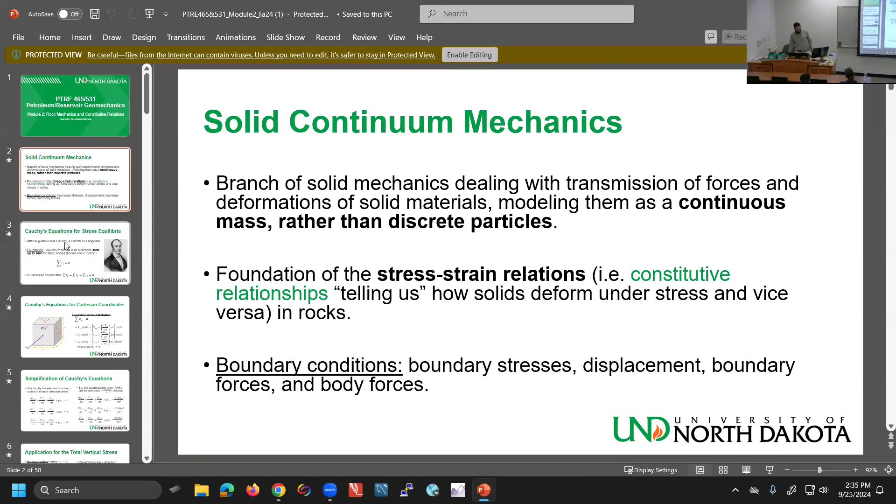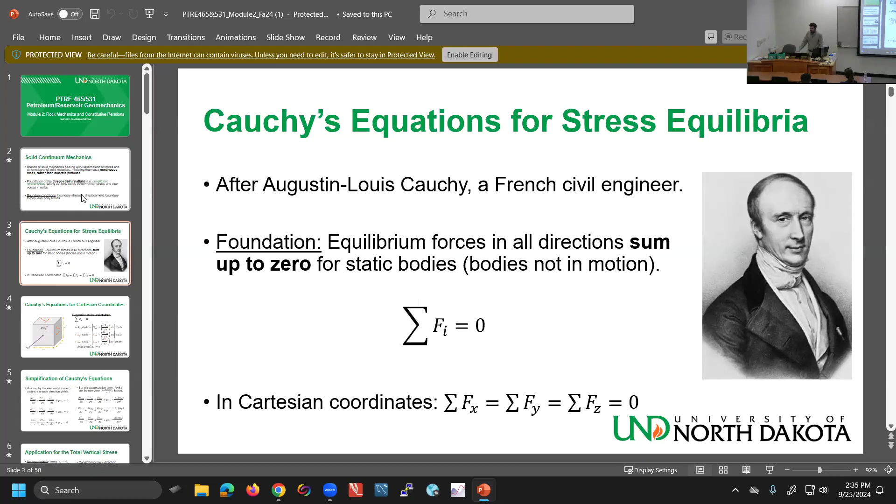PTRE 465/531. Last time we went a little bit fast through 15 slides, which were a little bit overwhelming. We talked about constitutive relationships and we started putting everything together. We went from a force balance in each principal direction to a matrix notation, a tensor notation.

We started putting a lot of equations together, and there was not a mistake, but some confusion I made accidentally, because both terms have ACC in how they start. So this is the acceleration term. This is the accumulation term. So acceleration is the one that has the A alpha whatever.

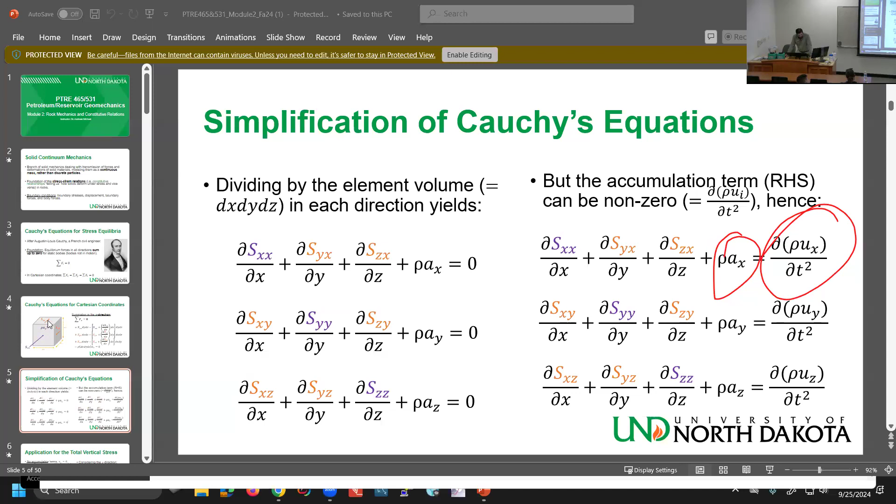Another way to show it is here. Acceleration term, accumulation term. Remember, accumulation is with respect to time, always. And when you hear something is steady state, all accumulation terms should go to zero. So that's something I wanted to clear up. I watched the video and tried to go over what we did, in case I went over something a little bit too fast.

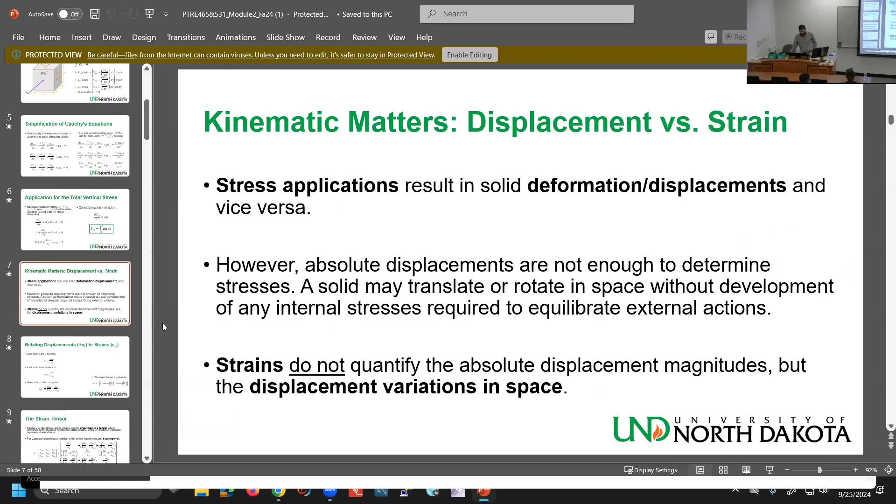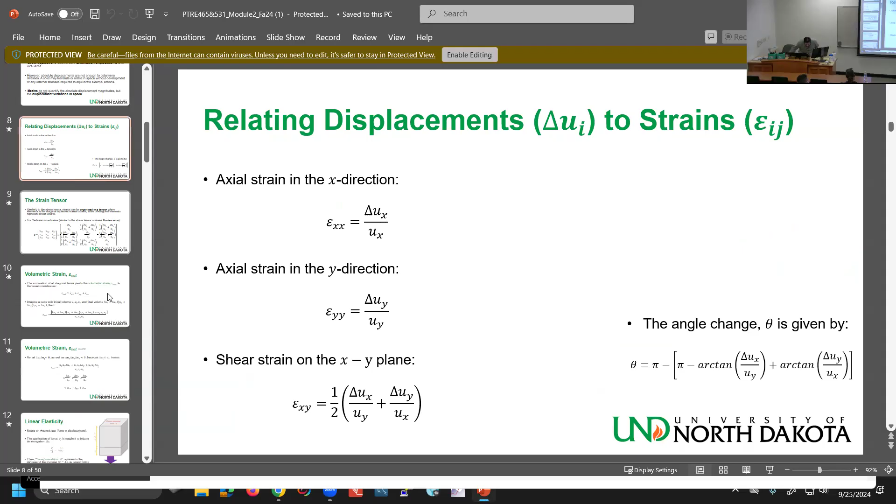And then we said that this is good for small deformations in rocks. So for small deformations in rocks, linear elasticity is okay. It's not an amazing model, but it's an okay model. And given that it's the easiest constitutive model to apply, we will go with that.

But we said in real life, rocks have what we call anisotropy and what we call heterogeneity. And I went through that a little bit fast. I need to explain them. So heterogeneity means if I go from one place in the rock to another, I have different properties. I have different properties where Malek is sitting than where Hakim is sitting, etc.

Now, anisotropy has to do with tropos, which means way in Greek, basically direction. So if I'm looking at one direction, I have one value. If I look at a different direction, I have another value. And so these are both degrees of complexity that I might have in the rock that my model will struggle to incorporate. So I wanted to explain them.

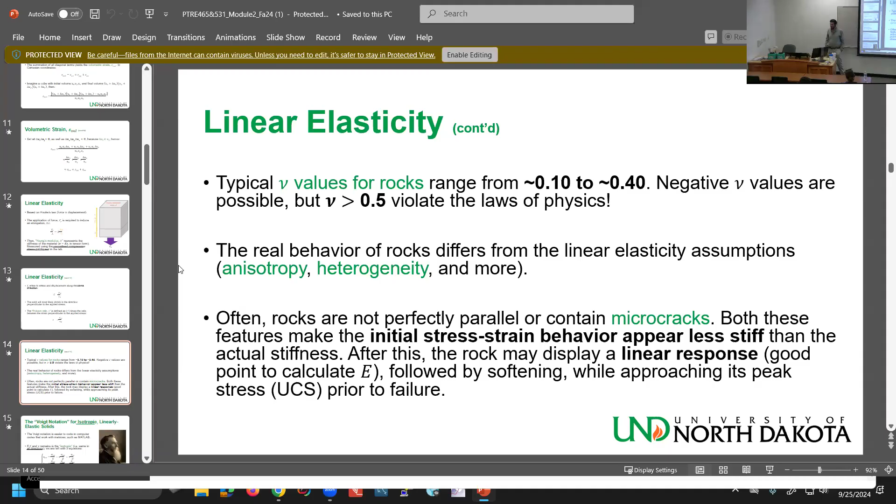The Young modulus, which is basically: I apply a force on my material, I extend it in the direction that the force is applied, and then I get a measure of the stiffness, and that measure of the stiffness is Young modulus. The stiffer the material, the higher the Young modulus. And the Young modulus has dimensions of pressure.

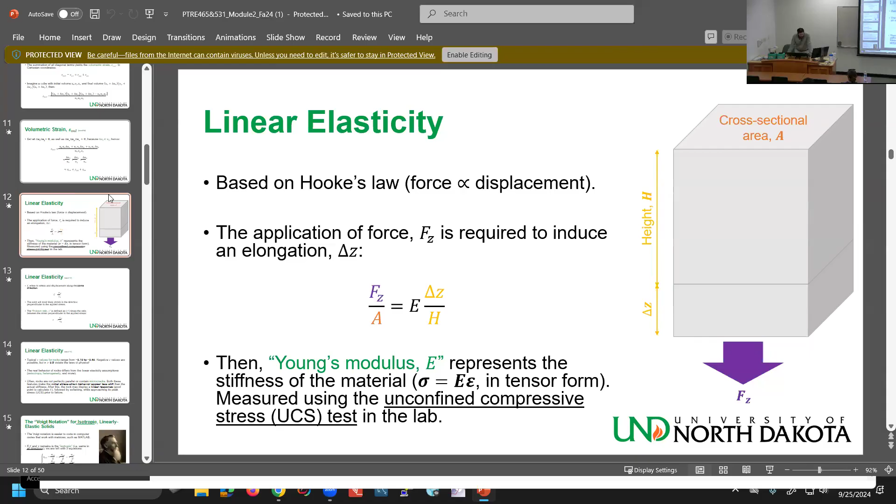And then we talked about another one, and we have upcoming example problems that will help you understand how these are calculated. Poisson's ratio, which you should already know from solid mechanics, is dimensionless. If I elongate a piece of chewing gum, it becomes narrower. I compress it, it becomes fatter. Displacement in one direction induces displacement in the orthogonal direction, given by Poisson's ratio, which is dimensionless.

And even though the name is Poisson's ratio, it's still a modulus, because if I assume that my model is linearly elastic, there are 6 moduli that can be used to characterize how it behaves, stress versus deformation. Out of those 6, the way they are interconnected, you only need 2 to get the other 4.

And generally speaking, Young modulus and Poisson ratio are fairly easy to measure in the lab and very easy to understand physically. We are going to see the remaining 4, but it gets a little bit more complex. It has to do with wave speed through the solid and other stuff. But Young modulus and Poisson ratio, you need to know physically what they quantify and be comfortable with them.

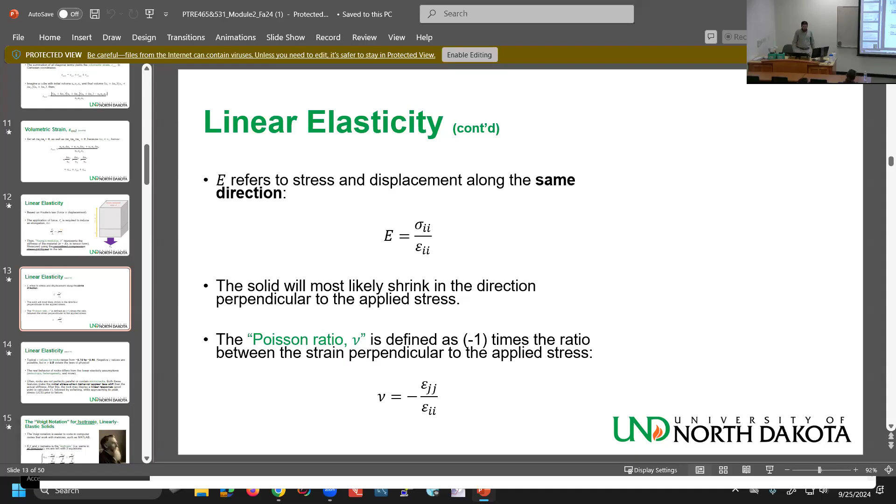So now, what did we say? There is anisotropy, so different in X, different in Y, different in Z. And then the way that those properties are arranged is such that you end up with a 9x9 matrix tensor.

So you have 81 values in it. That means if you have one core, you have to make 81 measurements for each property, 81 times, and you have a lot of complexity and associated errors as well. It becomes a mess. And this guy, Voigt,

he was a mathematical physicist, German. He was an amateur musician. Like a pianist as well, I guess. Yeah, but he was a Bach guy. Pianist. It's like one of the complex melodies they do in the orchestra, you know? German melody. Oh, okay, that makes sense. But he was a chair of a department. He was a big guy in academia. So music was his hobby.

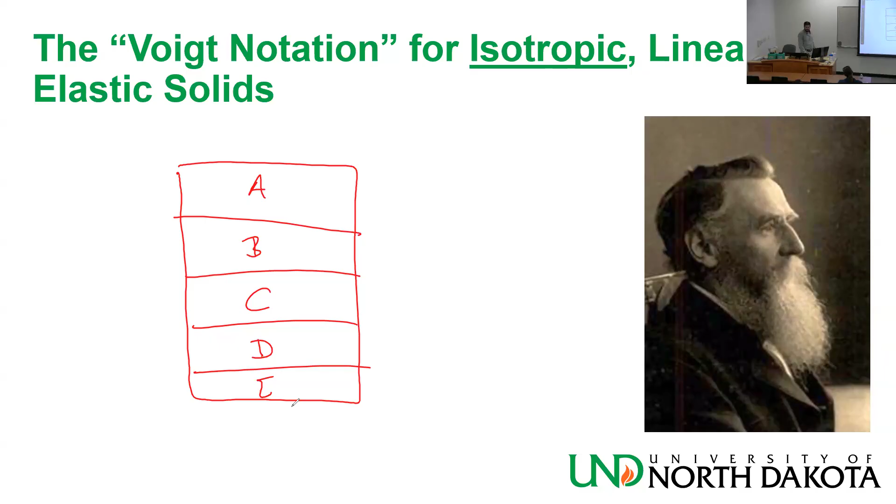Shales too. These are very useful, then Voigt's notation can be good for each layer. It helps simplify things by assuming isotropy. And even if you have anisotropy, it's not useless. You can still use it a certain way. But yeah, the tensor as we know it was his concept.

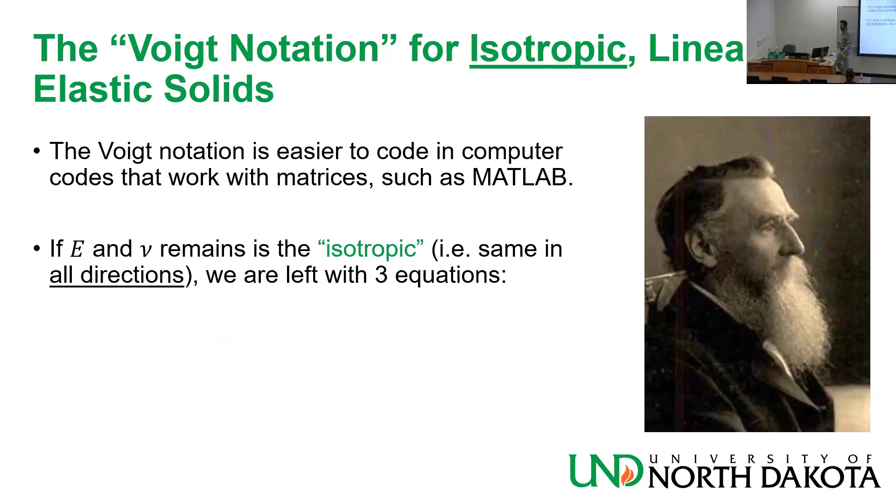And isotropic: let's assume that E and ν, Young's modulus and Poisson's ratio, are the same in every direction. So I have isotropy, and then I'm left with three equations for the normal strain. The normal strain in the x direction is the one induced by sigma xx, normal to it, minus the Poisson ratio times what is induced by sigma yy, which acts perpendicular, minus the Poisson ratio times what is induced by sigma zz.

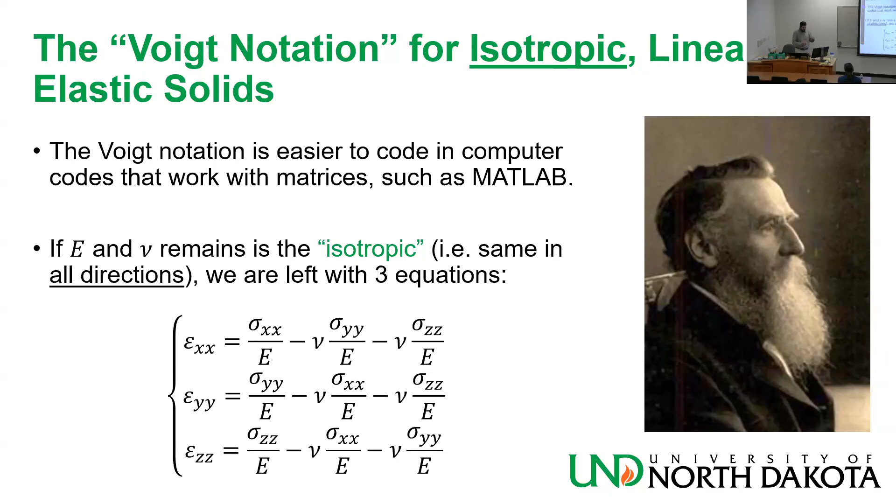Now, if you are confined on the side, imagine I'm applying a stress like this, the walls are holding it together, so they are applying stress in the lateral direction. I need to take account of that too. The earth is like this, you are confined. You get the tectonic stresses from the sides. And you have it in all three directions. It looks like you have two epsilon xx, but when you arrange them in a certain way, it's going to be more understandable.

Shear strains now are a little bit more complex. We're going to use a new modulus, take it as I give it to you, there are two pages of derivations to get to it, but what we call the shear modulus of elasticity is basically the Young modulus divided by 2 times 1 plus ν, or E divided by 2 plus 2ν. And they are given by this.

Notice here they are all shear. Some use gamma here, and they use tau here. So you may read it from a book like Fjær's book from 2007, Petroleum Related Rock Mechanics. I believe he uses this notation.

Something like that. They use kind of lambda instead of. Lambda is something else. Lambda is the Lamé first parameter. We're gonna look into that. It's the direction of. Unless they use the capital lambda. Yeah, capital lambda, like a triangle sort of. No, but it has like kind of cube. That's for something else, I think. Do they use shear modulus? It's for a strain direction, something like that. Okay. I know they use lambda, but the capital lambda.

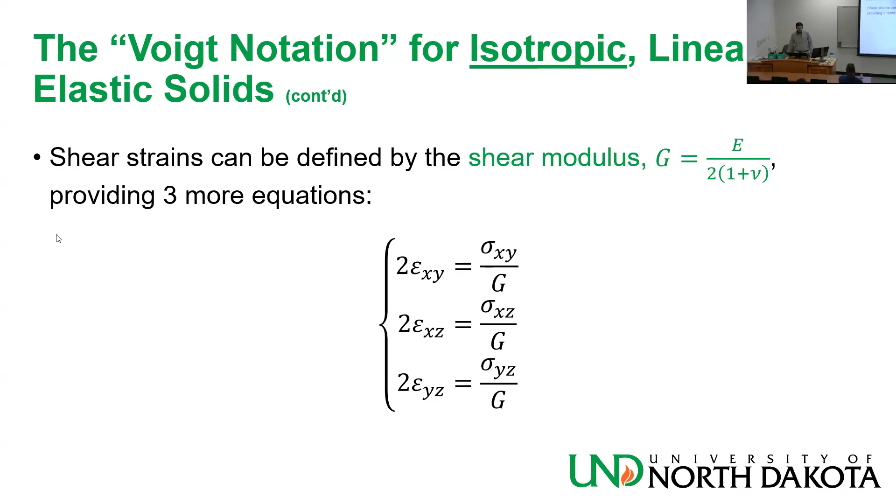Now, how about we combine them? We have 3 in the previous slide and 3 on this slide, and we put them together in a tensor. We combine everything together, and we have a stiffness matrix. So we are going to have the same equation as we had before, sigma proportional to strain, E epsilon. This sigma proportional to epsilon, but because it's in all directions, I cannot use E, right? I need to do something three-dimensional. So I am using tensor.

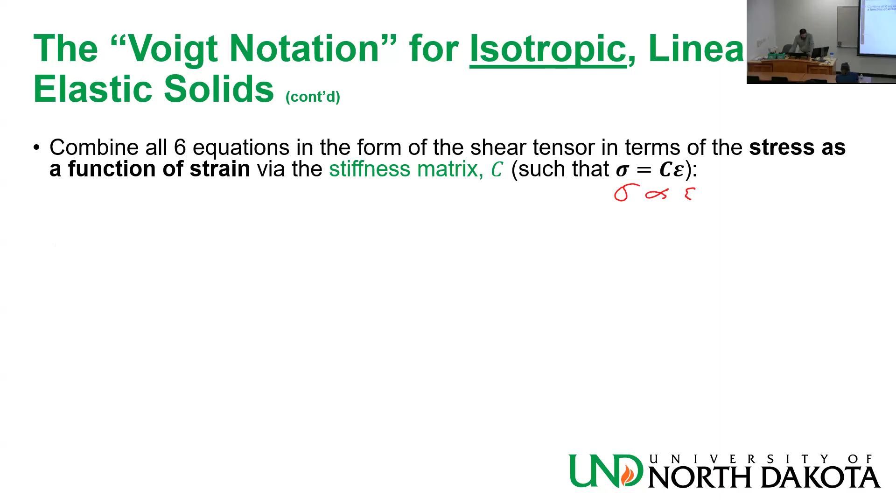I arrange them the way that Voigt likes. First the normal, and then the shear, and then I have the stiffness matrix, and then I have the induced strains. So all these, sorry, this is the stiffness matrix C. Okay, so for the entire continuum like one mass, REV, for instance, if you are modeling with finite volume, this is the stiffness matrix.

If I'm isotropic, that means E is the same in X, Y, Z direction, ν is the same in X, Y, Z direction, and I only need 2 to have what I need. So I have sigma XX, sigma YY, sigma ZZ, sigma YZ, now it's the shear, sigma XZ, sigma XY, and the corresponding strains on the other side. And if you are using MATLAB and you are trying to solve this equation, as long as you set this matrix right, what do you do?

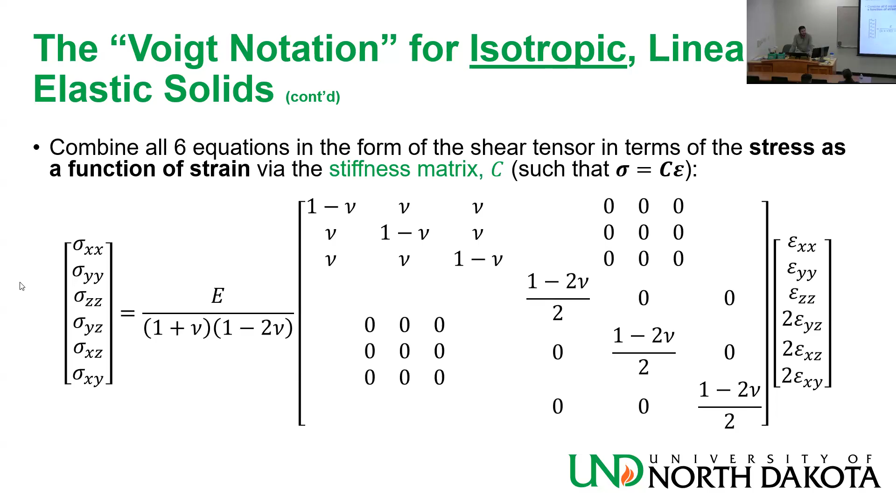Okay, so if we inverse the stiffness matrix, we will get the compliance matrix, right? If you reverse it. Inverse. Yeah. Inverse is like, if you multiply one with the other, you need to get the identity matrix. Oh, so the function, the inversion. Yeah, function inversion, INV in MATLAB.

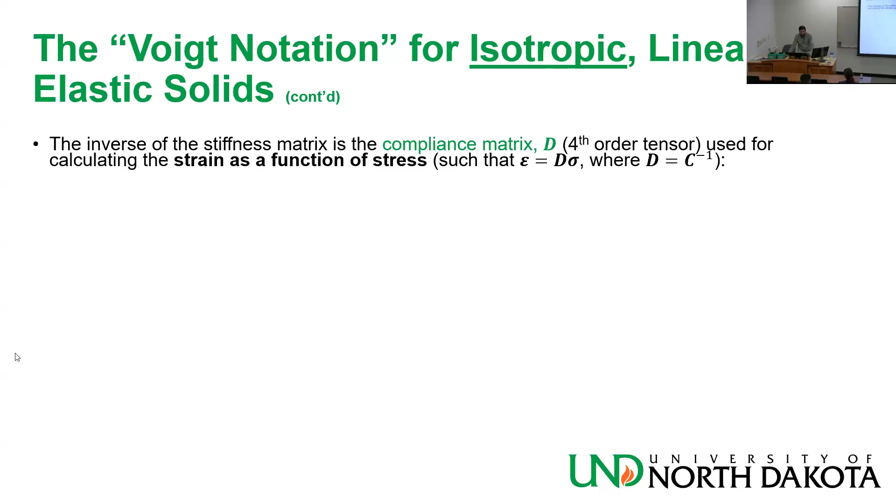Now, if you inverse it, you get, and sometimes it's kind of like exponential and logarithm, it's much easier to do it like this. Many times the compliance matrix is easier than the stiffness matrix to deal with mathematically, or arithmetically at least. It's the same thing, it's just reversed. And now I have epsilon equals D sigma. And again, I can use that AX equals B, X equals A\B command, hypothetically or potentially, but it's the same set of equations. I just calculate strains from stresses.

So, you see from those two slides, you go from stress to strain, and from strain to stress. But in a model, if you model a continuum, like an REV is a continuum, right? It's a mass. Everything has this. Now, if you model a system that has many of these, they are all dependent on each other, right? So there is a continuity, and the continuity is basically with Cauchy's laws, starting from Navier-Stokes momentum balance.

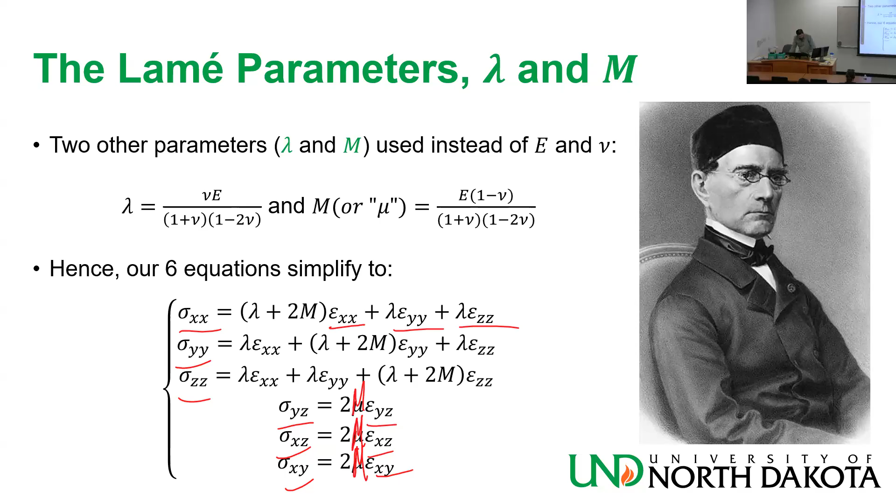Or the other way around. I get this 6, and sorry, I calculate this from this. So 6 on each side. I can go from one to another set. So this can simplify the expression of Voigt to the following.

As you see now, I don't have the mu here, the m here, I have it here, right? And again, it's the same thing. It's the stiffness matrix, right? But it's given in different pair of inputs. It's like, okay, how did you measure? What did you measure in the lab? Maybe you are not able to measure lambda and m. You are only able to measure E and nu.

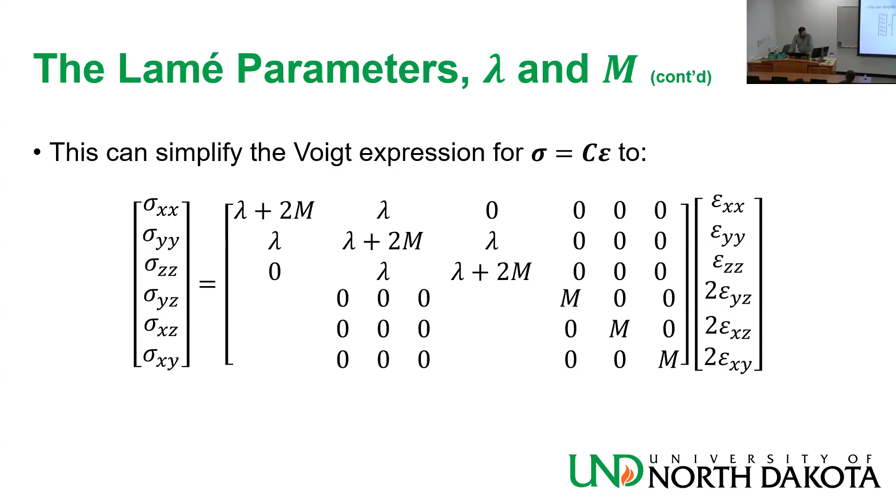What if you measure E and lambda? What if you measure E and m? Everything is possible. And remember what I said in the beginning of the class, you need 2 to get the other 4. It doesn't matter which 2, just as long as you have 2. And let's see the last one. We have time.

Bulk modulus. Okay, I leave it at the end because it's a volumetric property. So it requires a little bit different kind of thinking. You need to think about it volumetric wise, changes that happen in terms of volume. You need to think of it as the whole REV changing, not like in one dimension. It's a little bit more complex to understand, but it's actually more useful. We are going to see later, qualitatively or quantitatively speaking.

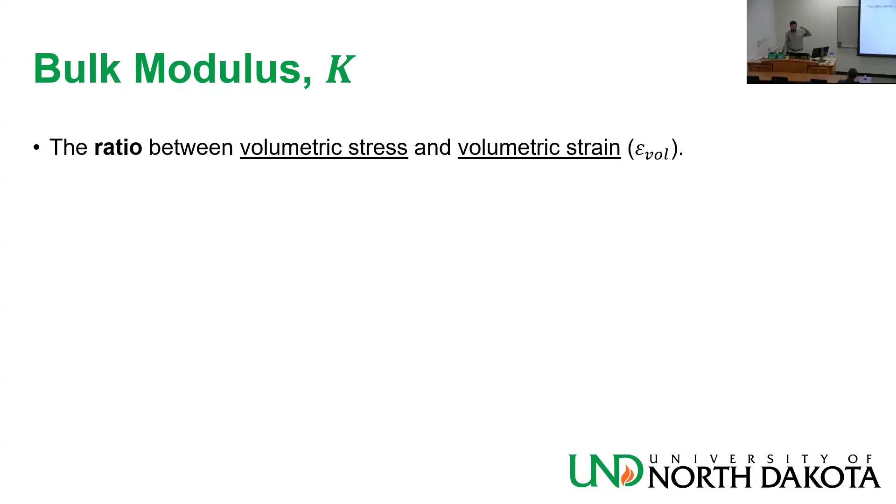So it's the ratio between volumetric stress and volumetric strain. I apply a volumetric stress and I get a volumetric strain. So these are 3-dimensional stuff. It's associated with the change in the volume of the body and determines how much the body will compress under a given amount of externally applied stress. This looks a little bit more complex, but it simplifies to this, okay?

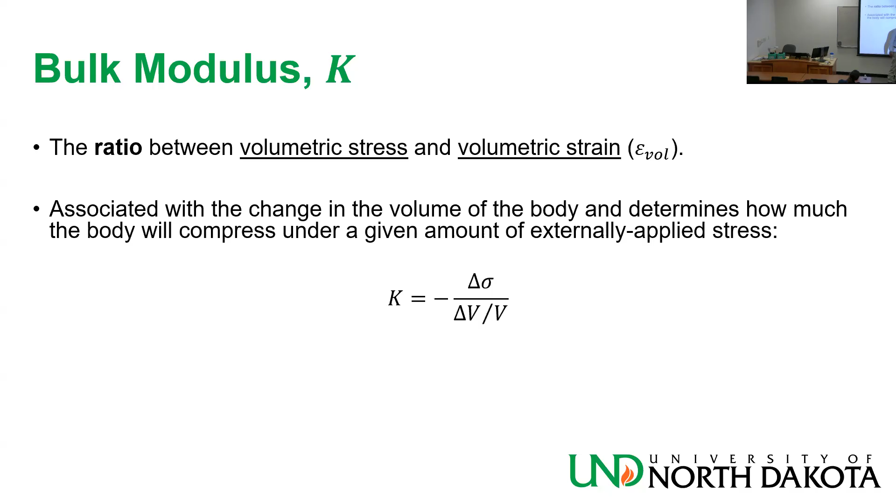I applied a change in the stress and I got a change in the volume. And I divide the change in the volume by the original volume, and then I have the change in the stress in the numerator. Now this is for a general linearly elastic material. For us, rock people, it can translate to change in porosity versus the original porosity. Compressibility. Yeah, inverse of compressibility.

Yeah, inverse. So if somebody gives you the bulk modulus of aluminum, he automatically gave you the compressibility of aluminum. If somebody asks you to calculate the bulk modulus of aluminum, I had a professor do that to me once, you go to Wikipedia and you find the compressibility of aluminum and you inverse it. 1 divided by, yeah.

So the units would be 1 over pressure. Let's just say 1 over PSI. In oil field, or in the office of operators or R&D oil field services, they use this unit, they call it SIP, like sipping tea. Like the reverse of PSI. It's square inch per pound.